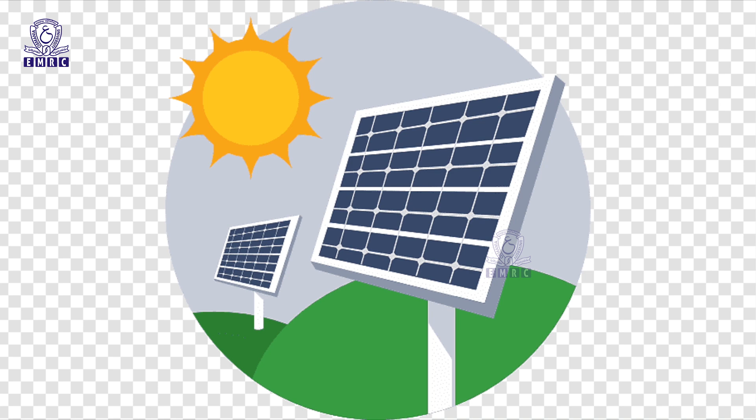Electricity is a clean source of energy. It is generated from water, coal, mineral oil, natural gas, and atomic minerals. Electricity can also be generated through wind energy, solar energy, biogas, sea waves, geothermal, and dry batteries. Electricity is relatively cheap, transportable, pollution free, and renewable. Because of these advantages, it is increasingly becoming popular day by day.

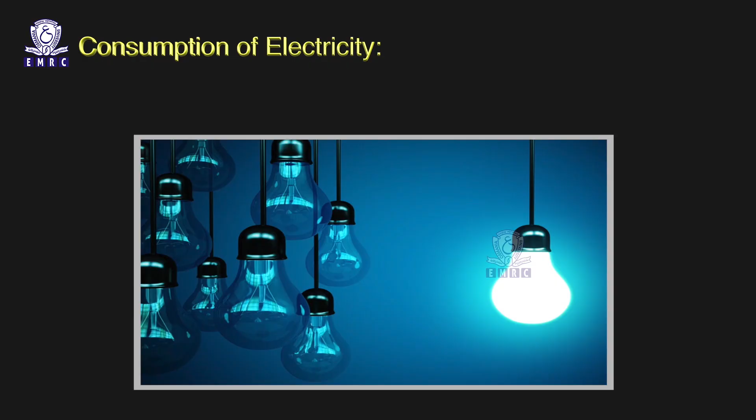The per head consumption of electricity is often considered an important indicator of socio-economic and human development. It is about 350 kilowatt hours, which is much below the per head consumption in the world, which is 1000 kilowatt hours, and in the United States, which is 7000 kilowatt hours.

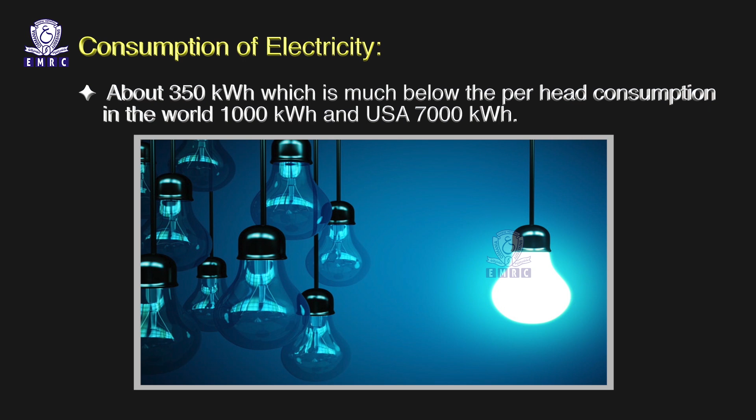In today's class, we will learn about hydroelectricity with regard to its regional patterns, important projects of hydroelectricity, advantages of using hydropower, issues of hydropower generation, and few of the government initiatives.

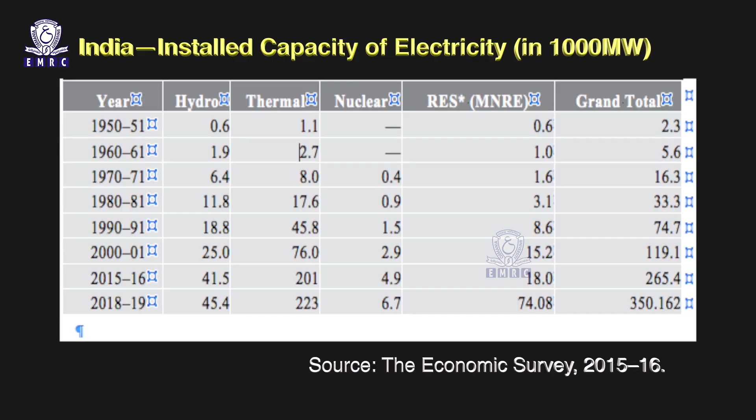The electricity production in India was started in 1898 when the Darjeeling Hydel Power Project was commissioned. The first thermal power plant was installed in Kolkata in 1899. Subsequently, the Mettur project in Tamil Nadu and the Sivasamudram project in Karnataka were commissioned. In the initial phase, the use of electricity was confined only to the big urban centers. The National Thermal Power Corporation was established in 1975, which established a number of thermal power stations based mainly on coal in different parts of the country.

As we were observing, the first hydroelectric plant in India was commissioned in 1898 at Darjeeling. It is followed by Mettur and Sivasamudram projects, which were commissioned in 1899 and 1902 respectively. The 4th hydropower station was built on the Jhelum river at Mohora in 1909.

Now let's look at few of the regional patterns of hydropower generation. The development of hydroelectricity depends on the perennial and seasonal character of the rivers, their monthly regime, undulating topography, suitable rock formations for the construction of the dam, and the demand for energy. Because of these factors, the development of hydropower is not uniform. Andhra Pradesh ranks first, followed by Karnataka, Tamil Nadu, Punjab, Maharashtra, Kerala and Madhya Pradesh.

Bhakra Dam is a joint venture of the Punjab, Haryana and Rajasthan governments. Constructed across the Sutlej River near Bhakra Gorge, it's one of the highest straight gravity dams in the world. The dam is 518 meters long and 226 meters high. Its reservoir is known as the Gobind Sagar, named after Guru Gobind Singh, the 10th Guru of the Sikhs.

It's a multi-purpose project funded by central government, built to generate electricity, provide irrigation, flood control, soil conservation, silt control, recreation, navigation, pisciculture, preserving wildlife and cattle rearing.

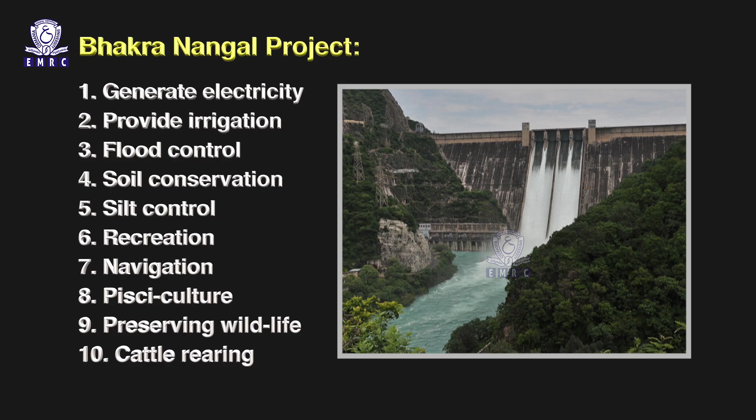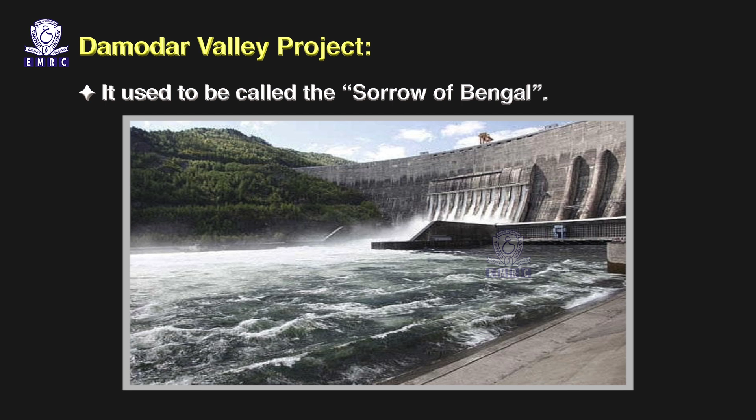The Damodar River is a tributary of Hooghly River. It used to be called the Sorrow of Bengal. The Damodar flows through Jharkhand and West Bengal. The Damodar Valley Corporation was established on 18th of February 1948. Under this project, 7 dams were constructed, namely Tilaiya, Balpahari, Maithon, Konar, Bokaro, Aiyar and Panchet dams.

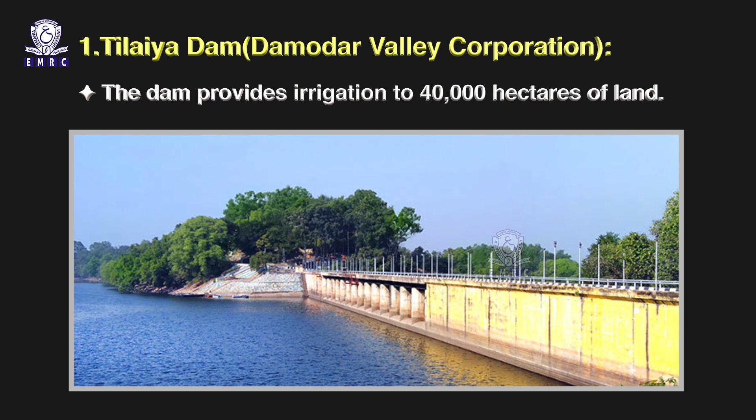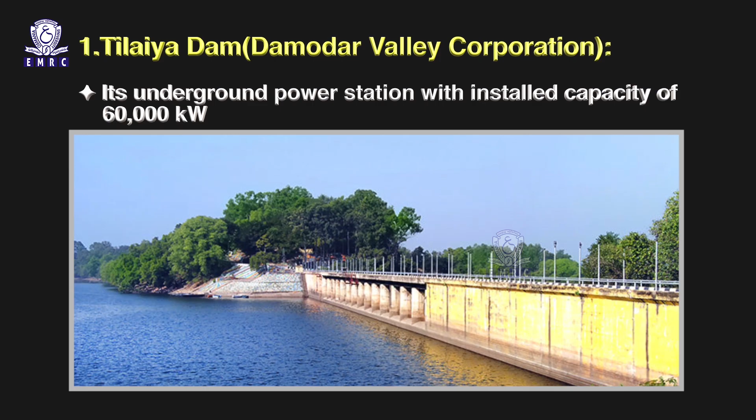This Tilaiya dam has been constructed across the Barakar River. It is the only concrete dam in this area. 2 power stations of 2000 kilowatt each have been set up here. The dam provides irrigation to 40,000 hectares of land. It has helped in the reduction of the floods. The dam was completed in 1953. Its underground power station with installed capacity of 60,000 kilowatt provides cheap power to the mica mines in Koderma and Hazaribagh region.

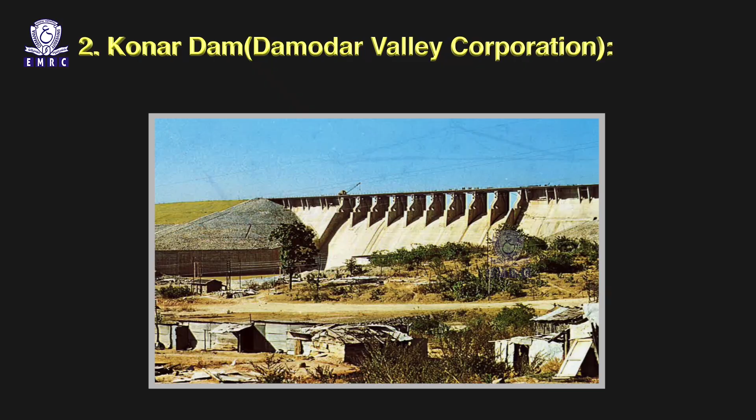The Konar Dam has been constructed across the Konar River, a tributary of the Damodar River in the Hazaribagh district. It was completed in 1955. It's an earthen dam with concrete spillway. Beside irrigation and power, it provides cooling water to the Bokaro steel plant. The Hydel station located near the dam generates about 40,000 kilowatt of electricity.

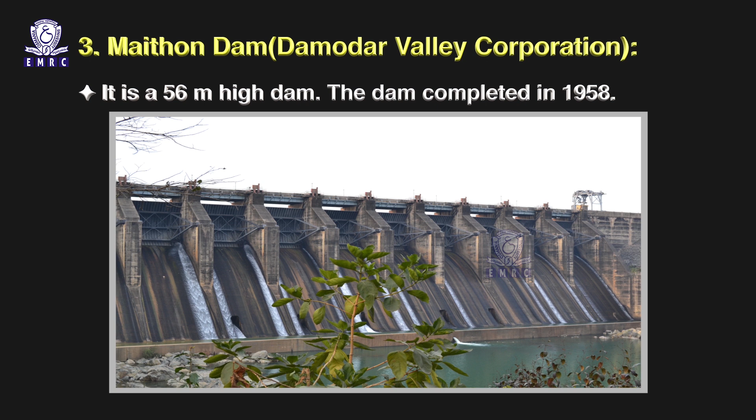This is constructed across the Barakar River near the confluence of Barakar with Damodar River. It is a 56 meter high dam. The dam, completed in 1958, provides irrigation to 50,000 hectares of arable land. The underground power station generates 60,000 kilowatts of electricity.

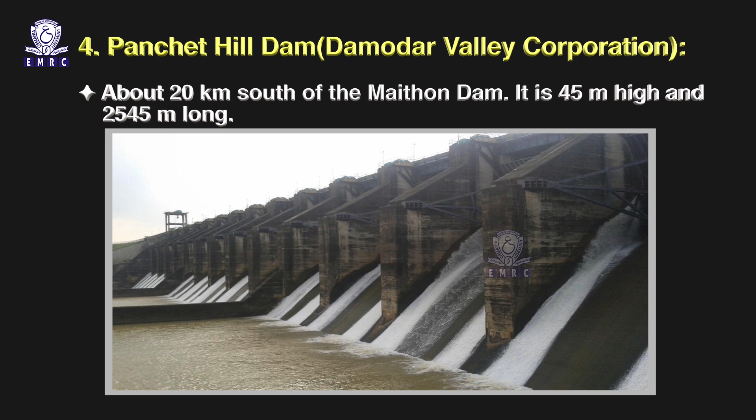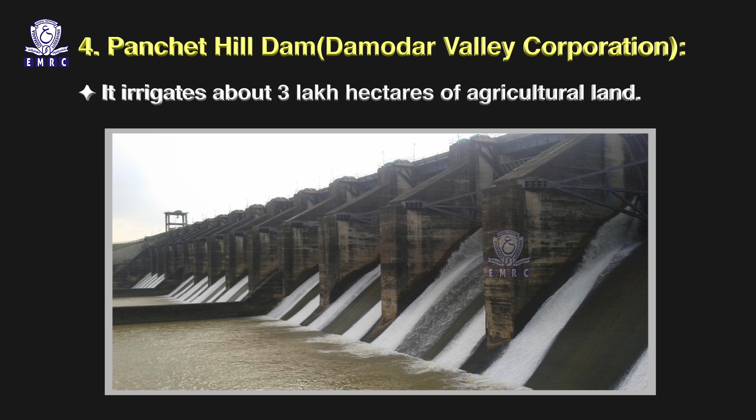The Panchet Dam has been constructed across the Damodar River about 20 kilometers south of the Maithon Dam. It is 45 meters high and 2,545 meters long. The power station near the dam has an installed capacity of 40,000 kilowatt. It irrigates about 3 lakh hectares of agricultural land. The Aiyar and the Bokaro and the Balpahari dams are located on the Damodar and the Barakar rivers.

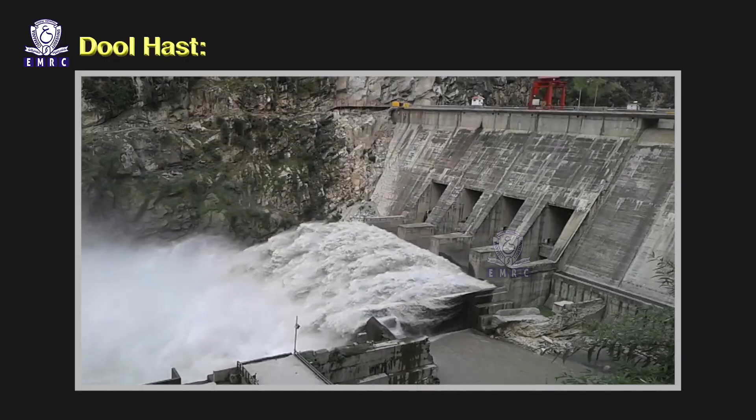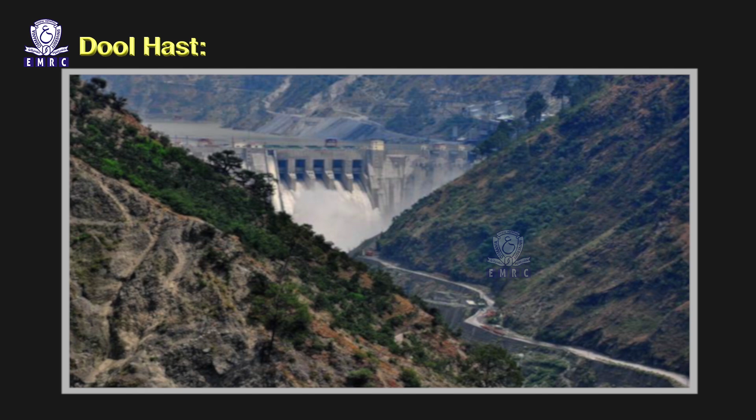The Dool Hast project has been constructed across the Chenab River in the Doda district of Jammu division. The main objective of this project was to harness the water of Chenab River and to generate electricity to be supplied to the main cities of the state, including the cities of Srinagar and Jammu. It was commissioned in 1986.

The Gandhi Sagar project has been constructed across the Chambal River. The installed capacity of Gandhi Sagar Dam is 115 megawatts. 5 generators have been installed at the Gandhi Sagar, 4 with a capacity of 2,300 kilowatts and 1 with a capacity of 2,700 kilowatts. It is providing power and irrigation to the surrounding regions of Rajasthan and Madhya Pradesh.

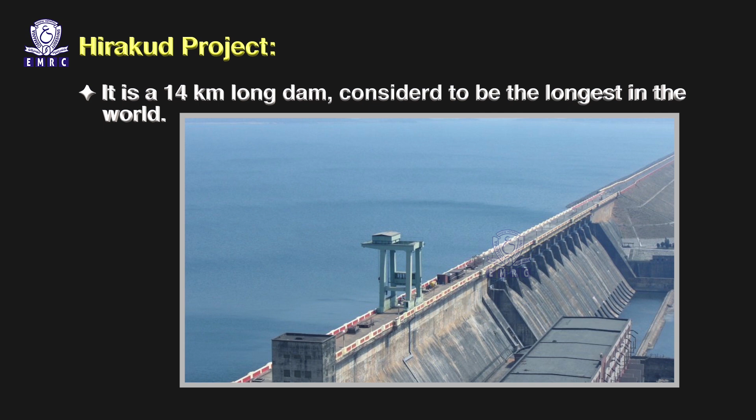It is constructed across the Mahanadi River. This project was funded by central government. It is a 14-kilometer long dam, considered to be the longest in the world. The project involves the construction of 3 dams across Mahanadi at Hirakud, Tikrapara and Naraj. The Hirakud project, according to recent study, has increased floods and droughts in the region. Due to increasing siltation, the storage capacity of the reservoir has been reduced, causing floods in the lower catchment area of Mahanadi.

The Nangal Dam has been constructed at Nangal, about 13 km downstream of Bhakra Dam. It is about 13 meters high, 305 meters long and 121 meters wide. Its main function is to generate electricity. It also supplies water to the Bhakra canals.

Next we have the Jawahar Sagar Dam. This dam has been constructed to the north of Rana Pratap Dam in the state of Rajasthan. It is about 40 kilometers to the north of Rana Pratap Sagar. It is a multi-purpose project constructed to generate electricity, control floods and provide irrigation water to the catchment area.

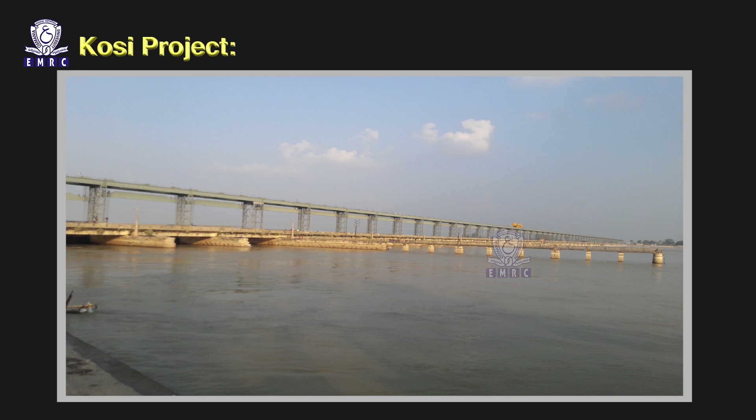Now we have the Kosi project. The Kosi river, often called the Sorrow of Bihar; the project is an outcome of the joint agreement between the Nepali and Indian governments reached in 1954. Its main objective is to construct a barrage near Hanuman Nagar in Nepal, to build embankments on both the banks of the river to control the floods, to construct canals for irrigation and to generate hydropower. Kosi in July 2008 shifted its course about 100 kilometers towards the east and caused great damage to life and property.

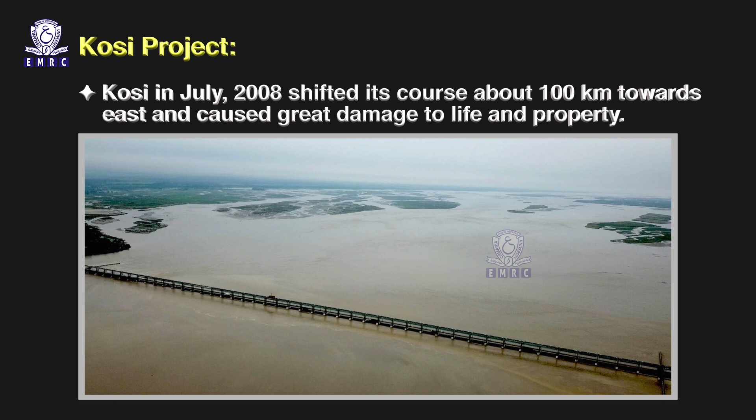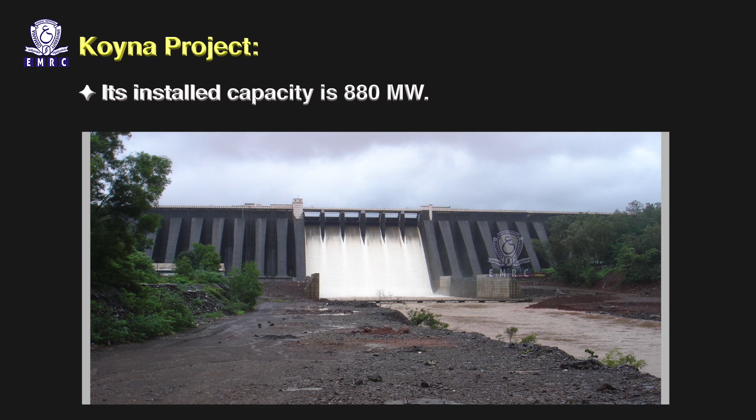It's a multi-purpose project in the Satara district of Maharashtra state. Its installed capacity is 880 megawatts. Its hydroelectricity is being supplied to the cities of Satara, Sholapur, Sangli, Kolhapur and Pune.

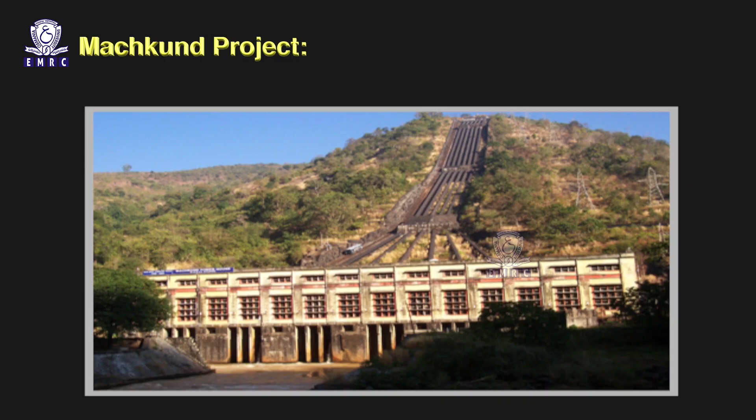Next we have the Machkund project. It's a joint venture of Andhra Pradesh and Odisha states. The Machkund dam is 54 meters high and 410 meters long. It is mainly a hydroelectric project which shall generate 115 megawatts electricity.

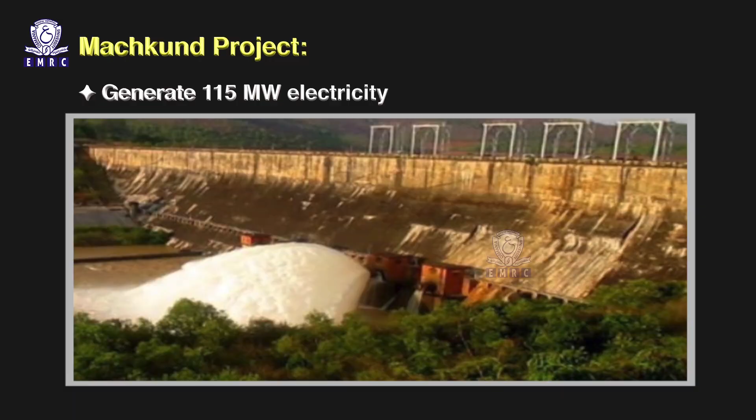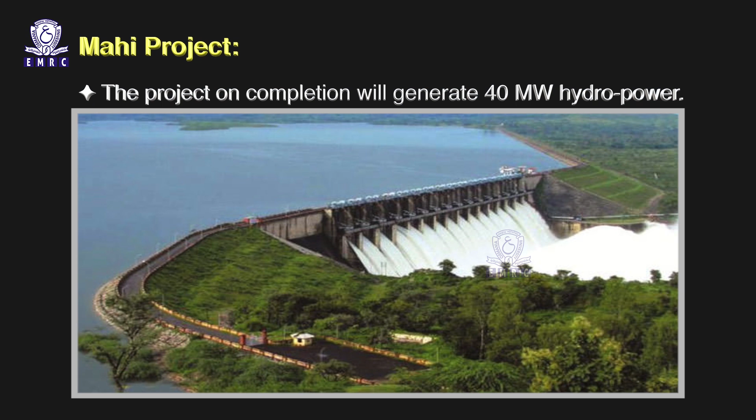Next we have the Mahi project. This project has been constructed across the Mahi river, which originates from the Vindhyan hills of Madhya Pradesh. The project on completion will generate 40 megawatt hydropower and shall irrigate 80,000 hectares of agricultural land.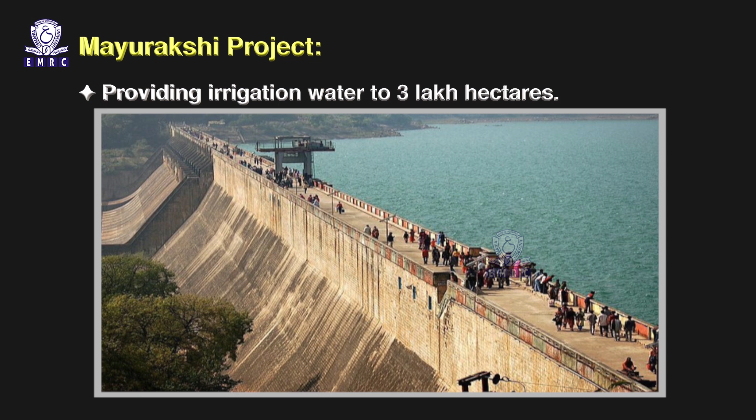The Mayurakshi is a tributary of Hooghly. It rises from the Chota Nagpur plateau and flows through Jharkhand and West Bengal. It's a multi-purpose project generating 4,000 kilowatt of electricity and providing irrigation water to 3 lakh hectares. Electricity from this project is supplied to Murshidabad, Birbhum of West Bengal and Santhal Pargana of Jharkhand region.

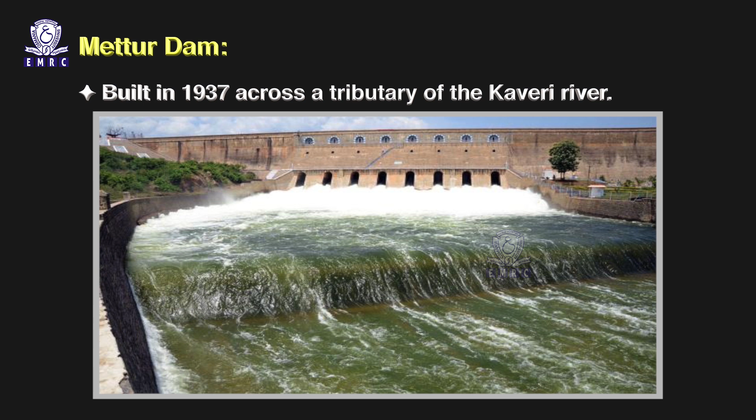The Mettur Dam was built in 1937 across a tributary of Kaveri river in the Nilgiris. The project has a capacity to produce 240 megawatts of hydroelectricity. The Mettur Dam is not only generating electricity and providing irrigation water, but it also helped in the flood control in the basin.

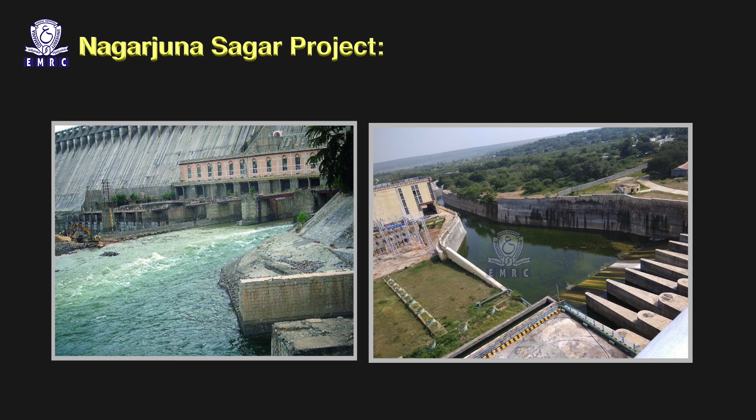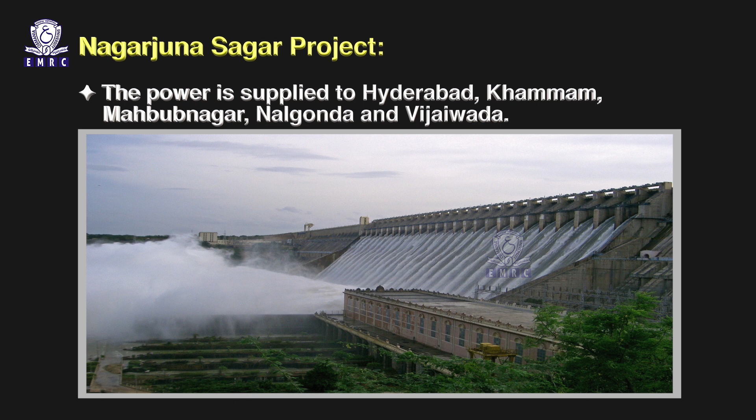The Nagarjuna Sagar project has been constructed across the Krishna river in Nalgonda district of Telangana state. Its right and left bank canals have been named after Jawaharlal Nehru and Lal Bahadur Shastri respectively. The power plant generates 210 megawatts of hydroelectricity. The power is supplied to Hyderabad, Khammam, Mahbubnagar, Nalgonda and Vijayawada.

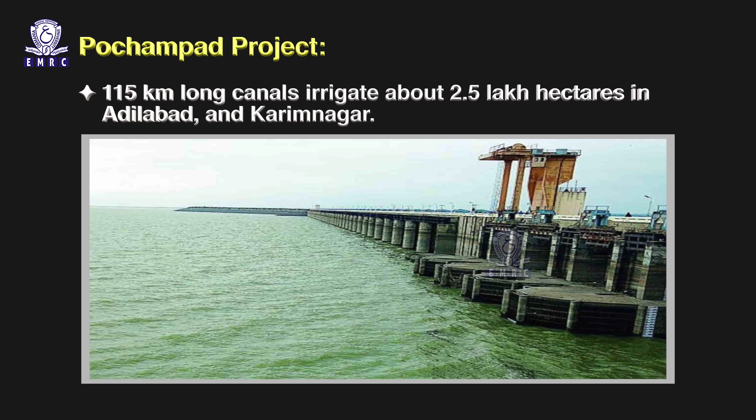This project has been constructed across the Godavari river in Adilabad district. Its 115 kilometers long canals irrigate about 2.5 lakh hectares in Adilabad and Karimnagar districts of Telangana.

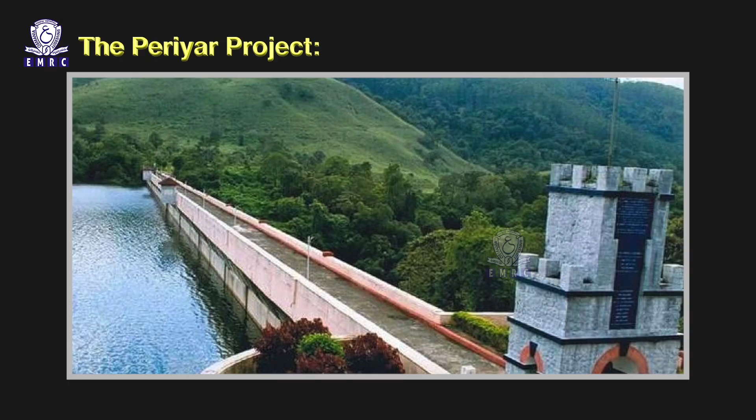This is originating from the Cardamom Hills. Periyar is an important river of Kerala. A dam has been constructed across its course in the hilly gorge. Its installed capacity is 140 megawatts. It's a multi-purpose project helping in the prevention of floods, soil erosion and generating electricity, being supplied to Ernakulam, Kochi and the neighbouring cities.

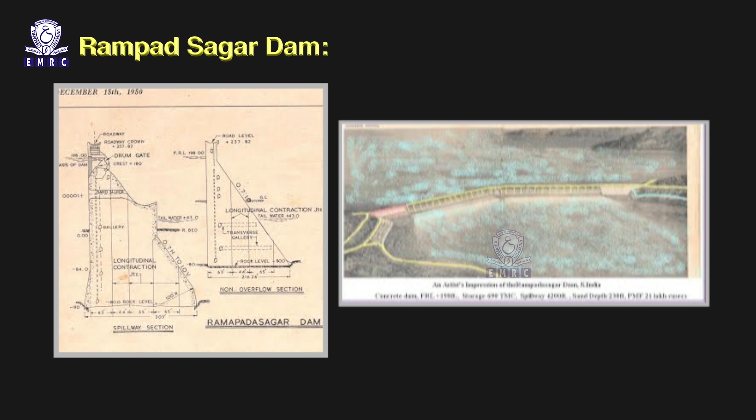This dam has been constructed in the lower reaches of Godavari river about 30 kilometers to the north of Rajahmundry. It's a multi-purpose project designed to check floods, to provide irrigation in the delta region of the river and to generate electricity.

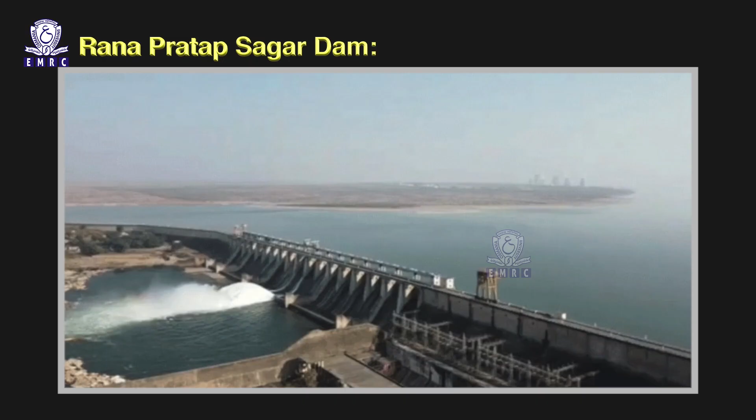This dam has been constructed across the Chambal river about 25 kilometers to the north of Gandhi Sagar Dam in the Kota district of Rajasthan. It's a multi-purpose project designed to generate electricity, to control floods and to provide irrigation water to the surrounding agricultural land. Its installed capacity is 99 megawatts.

Next we have the Rihand project. It's funded by the central government. It's the largest multi-purpose project of Uttar Pradesh. It has been constructed across the Rihand river, a tributary of Son river near Pipri village in the Sonbhadra district. The reservoir of the dam has been named after Gobind Ballabh Pant.

It is connected with the Obra Hydro Power Station and the Obra Thermal Power Plant located in the vicinity. The power generated from this project is supplied to eastern UP, western Bihar and northern parts of Madhya Pradesh. Flood control in Son Valley, control of soil erosion in Baghelkhand, tourism and pisciculture are other benefits from this project.

This project has been constructed across the Chenab River in the Reasi district of Jammu division of Jammu and Kashmir state, now Union Territory. The installed capacity of the project is 750 megawatts. It was inaugurated in 1986. The electricity is supplied to Reasi, Udhampur, Jammu and other districts, other neighbouring urban centres.

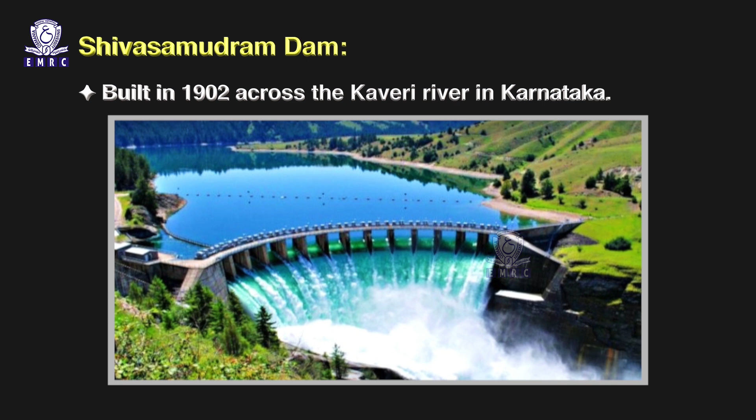Now let's look at the Shivasamudram Dam. The Shivasamudram project was built in 1902 across the Kaveri River in Karnataka. The main objective of this project was to supply electricity to the Kolar gold mines, the city of Mysore and the neighbouring urban centres. It helped in flood control and became a centre of tourist attraction.

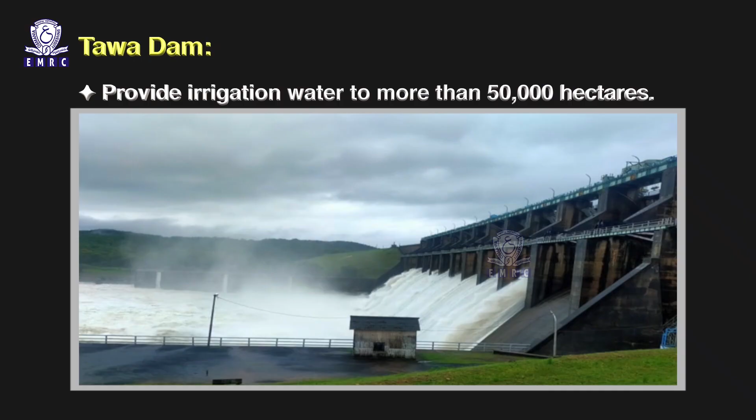This project has been constructed across the Tawa River, a left bank tributary of Narmada River. It's a multi-purpose project which has been designed to provide irrigation water to more than 50,000 hectares and has the installed capacity to produce 150 megawatts hydroelectricity.

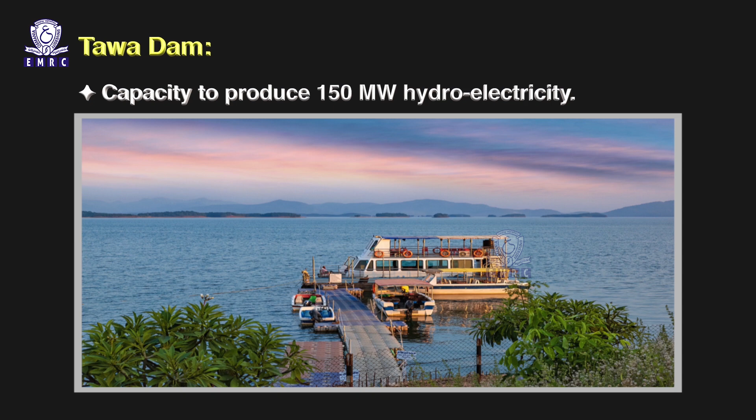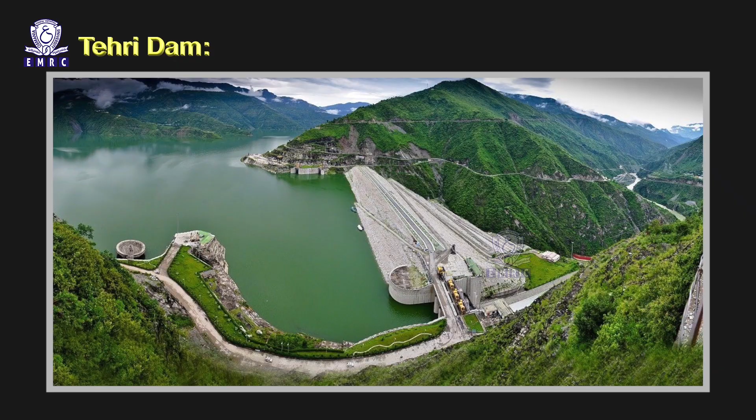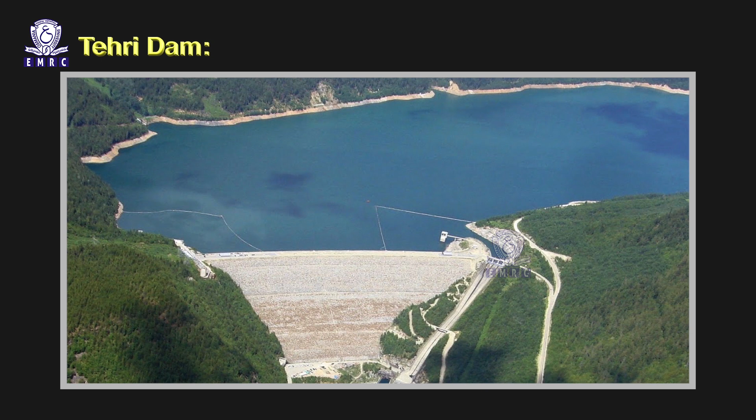The Tehri Dam is being constructed across the Bhagirathi River just below the confluence of Bhagirathi and Bhilangana in the Tehri district of Uttarakhand. It was conceived by the Planning Commission in 1972. The work on the project was started in 1975. It's the biggest, highest and tallest dam in India. The project is being implemented with Soviet, that is Russian, technical and economic aid.

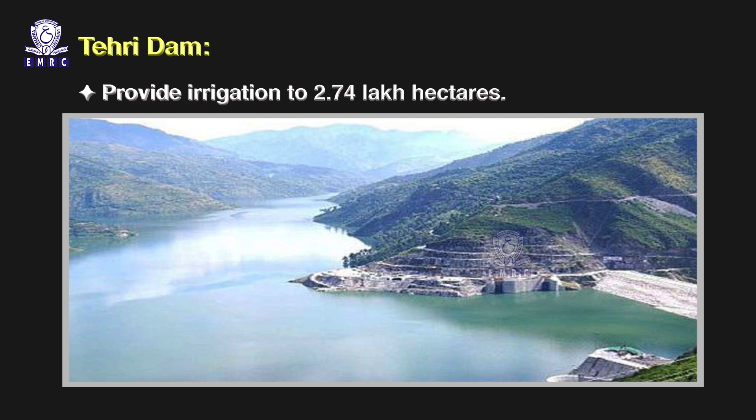The project will provide irrigation to 2.74 lakh hectares in Uttarakhand and western UP and will generate 1000 megawatts of hydroelectricity. Some serious objections were raised about this project as the environment and ecology may be adversely affected by this project, which has been constructed in a highly earthquake prone area of the country.

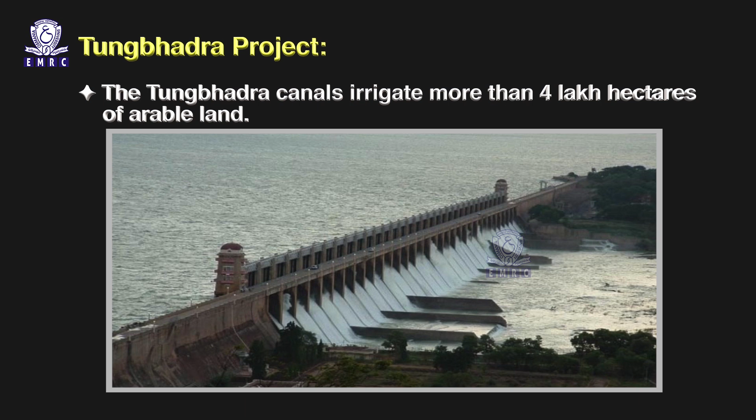Tungabhadra is a right hand tributary of Krishna River which originates from the Western Ghats of Chikmagalur district of Karnataka. The Tungabhadra Dam has been constructed at Mallapuram near Hospet in the Bellary district. 3 powerhouses have been constructed in the project to generate 126 megawatts of electricity. The Tungabhadra canals irrigate more than 4 lakh hectares of the arable land.

Ukai is a tributary of Tapi River. The Ukai project was launched mainly to harness the Tapi water. The installed capacity of Ukai project is 300 megawatts. Its electricity is supplied to Surat and other neighbouring urban centres.

Hydropower is a renewable resource of energy because it uses and not consumes the water for generation of electricity, and the hydropower leaves this vital source available for other uses. It is a renewable source of energy with no consumables involved. There is very little recurring cost and hence no high long-term expenditure. It is cheaper as compared to electricity generated from coal and gas-fired plants.

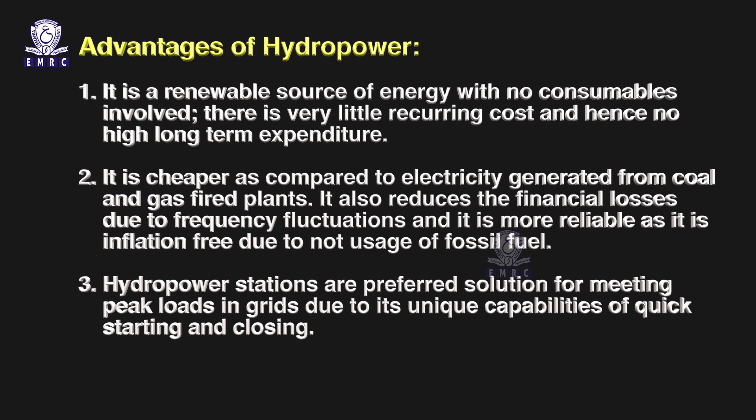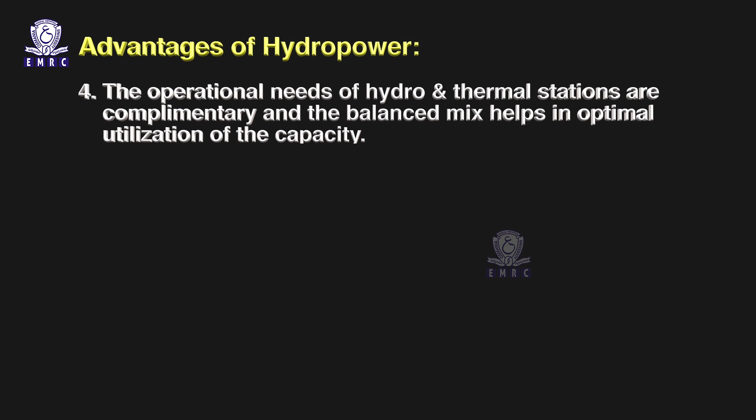It also reduces the financial losses due to frequency fluctuations, and it is more reliable as it is inflation-free due to not using fossil fuel. Hydropower stations are the preferred solution for meeting peak loads in the grids due to their unique capabilities of quick starting and closing. The operational needs of hydro and thermal stations are complementary and the balanced mix helps in optimal utilization of the capacity. Seasonal load curves of regional grids match with the pattern of hydropower generation.

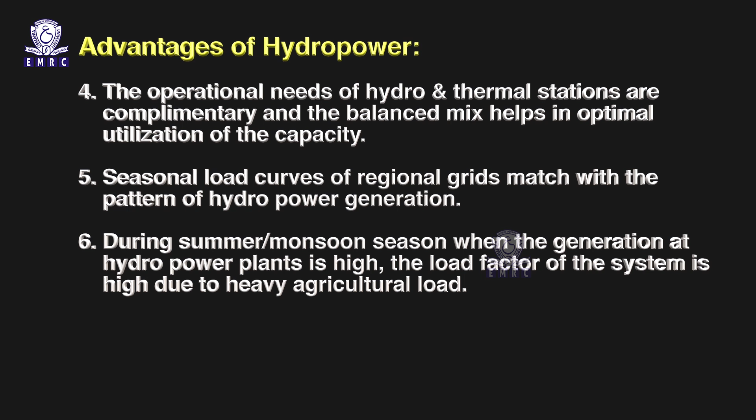During summer or monsoon season, when the generation at hydropower plants is high, the load factor of the system is high due to heavy agricultural load. During winter, the thermal stations operating at the base load and hydro stations working as peak load stations will take care of weather beating loads.

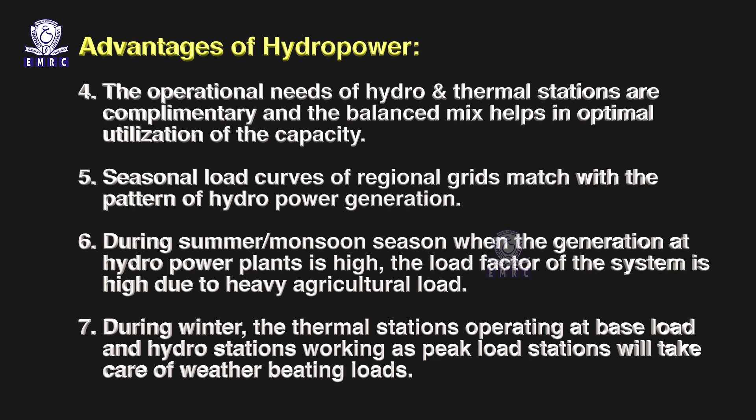Now let's look at a few of the issues in the hydropower generation. In central India, the hydroelectric power potential from the Godavari, Mahanadi, Nagavalli, Vamsadhara and Narmada river basins has not been developed on a major scale due to potential opposition from the tribal population. Hydropower's share in the electricity mix has, however, been decreasing over the years, accounting for around 10% of the generation, with the majority coming from thermal generation.

Many current hydropower projects have been slow going, with delays due to complex planning procedures, prolonged land acquisition and resettlement, a lack of enabling infrastructure including transmission, insufficient market scope and long-term financing. Several hydroelectric power projects in India are languishing due to contractual conflicts, environmental litigations, local disturbances, financial stresses and unwilling purchasers. Only about 10,000 megawatts of hydropower could be added over the last 10 years.

As water and water power are state subjects, the construction of hydroelectric projects is often delayed due to conflicts among the riparian states. The Subansiri hydroelectric project is a prime example of this.

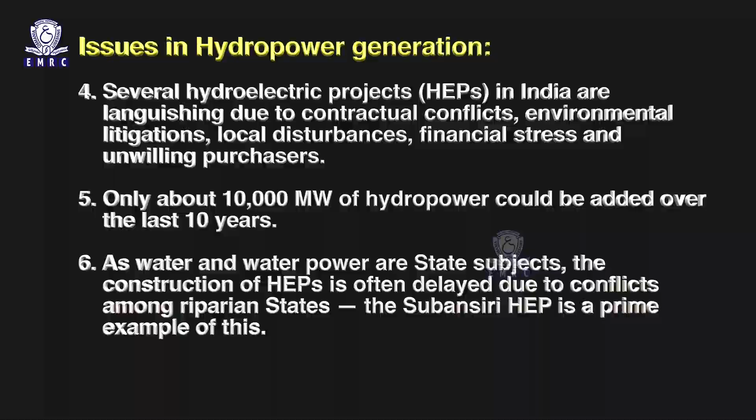Now let's move on to the next topic, which is governmental initiatives. Kishanganga hydroelectric plant has been commissioned in Jammu and Kashmir. The 60 megawatt Tuirial project in Mizoram is also a step in this particular direction. The potential has been leveraged in the neighboring countries, for example the Mangdechhu hydroelectric plant with 720 megawatts in Bhutan.

About 6,379 unelectrified villages have been electrified and 26,284,350 households have been given electricity connections as per the Saubhagya Yojana since 2017. The Integrated Power Development Scheme (IPDS) shall ensure 24/7 electricity for all the urban areas. The Deen Dayal Upadhyay Gram Jyoti Yojana shall also provide separate feeders and strengthen the sub-transmission and distribution infrastructure at all levels in the rural areas.

The Ujwal Discom Assurance Yojana (UDAY) scheme is to obtain the operational and financial turnaround of state-owned power distribution companies. The Unnat Jyoti by Affordable LEDs for All (UJALA) was launched in 2015 and is undertaken by Energy Efficiency Services Limited. This project is also known as Prakash Path. LED bulbs are freely distributed to decrease the power consumption. These are a few of the government initiatives to ensure electricity to all in India.

Hydroelectric power is electricity produced from generators driven by turbines that convert the potential energy of falling water into mechanical energy. India overtook Japan in 2019 as the 5th largest world hydropower producer by capacity, which currently is 50 gigawatts. Only China, Brazil, the United States and Canada have a greater hydropower capacity globally.

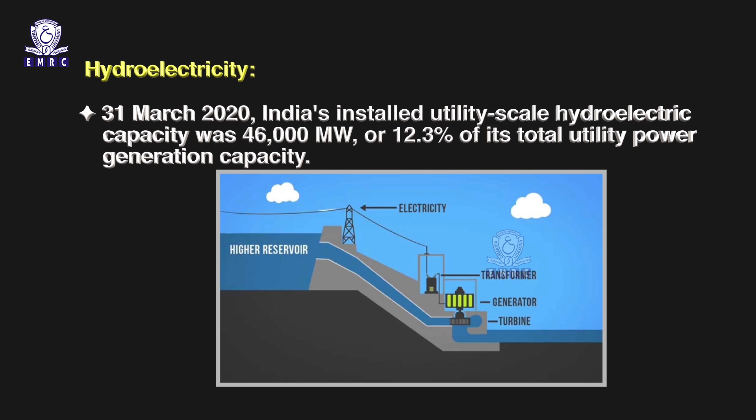The country has 197 hydropower plants capable of producing more than 25 megawatts according to the International Hydropower Association, plus 9 pumped storage stations accounting for 4,786 megawatts capacity. As of 31st March 2020, India's installed utility scale hydroelectric capacity was 46,000 megawatts or 12.3% of its total utility power generation capacity. The public sector accounts for 92.5% of India's hydroelectric power production. We have a long way to go in hydroelectric power production.